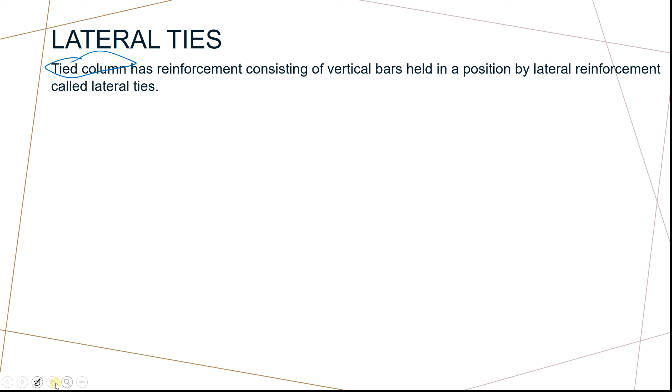So after the main bars, lateral ties na punta. So tied column, di ba natin ito kaklase sa column, we have the tied column, we have also the spiral. So sa tied column, iyang ties ginatawag na to lateral ties. So katong vertical reinforcement is being held in position by lateral reinforcement. Ginatawag na to na sila og lateral ties.

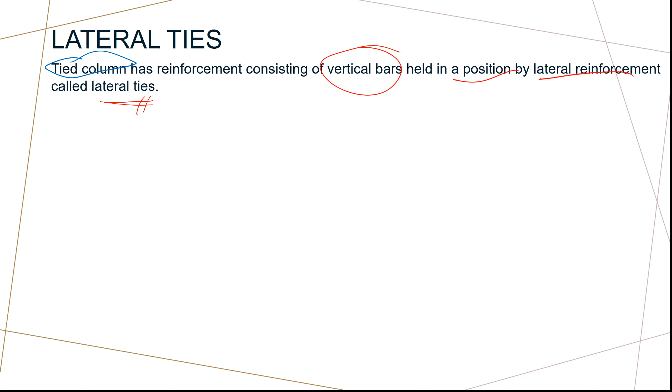Okay. So as per the ACI code, all non-prestressed bars for tied column shall be enclosed by lateral ties of at least number 3. So kaning number 3, this is the imperial, and then ako lang ning gibutang ang SI. Size number 3 is 10 mm for SI. So for bars nga 32 millimeters diameter or lesser, lateral ties should be at least 10 millimeters.

And for bars nga 36 millimeters up to 57 millimeter diameter, and katong nakabundled, ang imong gamiton nga lateral ties is 12 millimeters. Unsa man ning bundled, sir? So, di ba, atong naandan nga ang columns, iyang bars kay nakatagsa. Ang bundled is itulo diri gibundle, that is ginatawag na bundled. Aron makakuha sa space and same ra gihapon makuha ang reinforcement. So, if bundled, at least 12 millimeter ang ties.

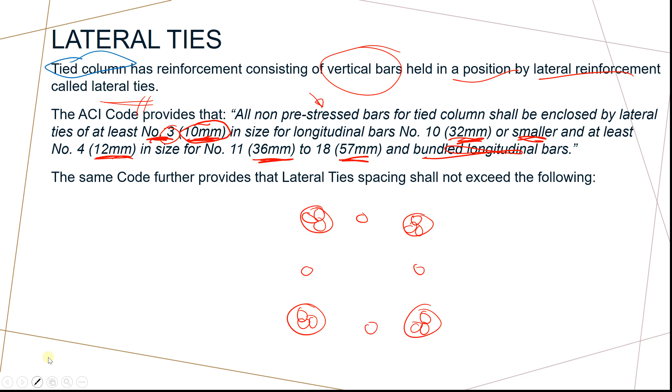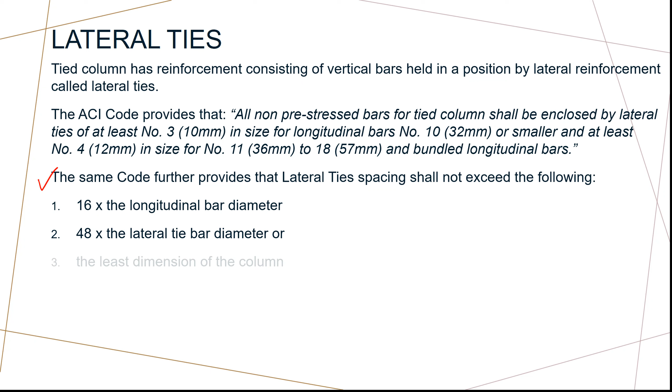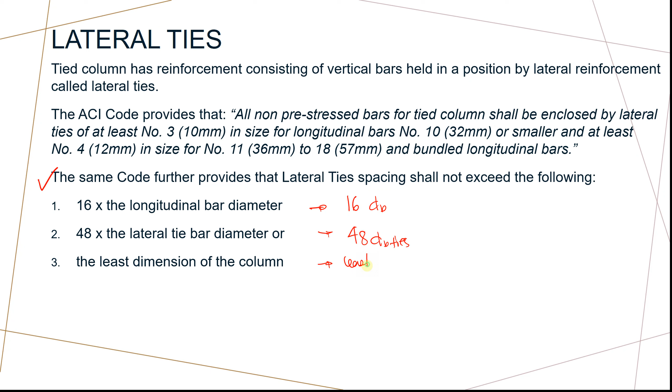The same code further provides the lateral ties spacing. So, as per the ACI gyapon, the maximum spacing should be either 16 times the bar diameter of the main bar, or 48 times the bar diameter of the ties, or the least dimension of the column. So, aron masabtan, diretso ta sa example. By the way, this is the bar designation number and then the inches and mm. So, bar number 3, that is 10 mm. Bar number 4, that is 12 mm diameter. Bar number 5 is 16 mm diameter, so on and so forth.

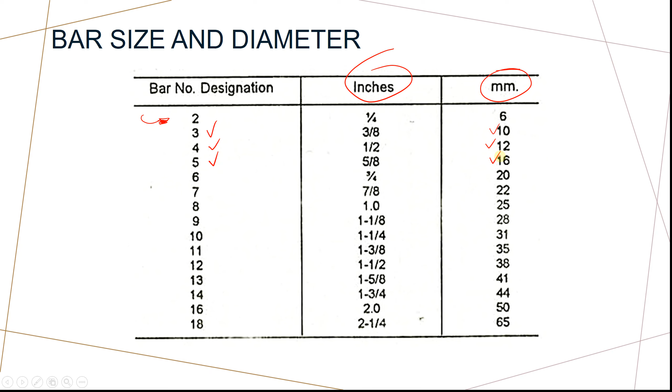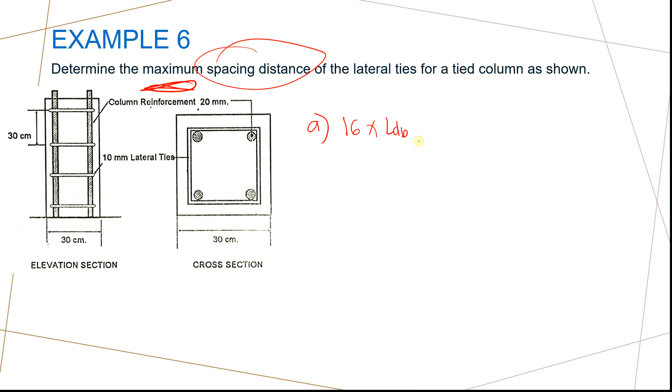Okay. So, we determine the maximum spacing distance of the lateral ties for a tied column. So, ang gipangayo diri is just the maximum spacing distance. Sa pagkuha sa maximum spacing, we have 3 considerations: 16 times the diameter of the longitudinal bars, 48 times the diameter of the tie bars, and the least horizontal dimension. So pila man ang diameter sa main bar? Tan-aw ka sa plan, nakabutang diri nga 20 mm. So 16 times 20 millimeters, that is equal to 320 millimeters.

And then 48 times pila man ang diameter sa ties? Nakabutang diri 10 millimeter lateral ties. So times 10 millimeters, which is equal to 480 millimeters. Now, ang ikatulo is the least, kinagamyan nga dimension sa column. So pila man ang dimension sa column? Ang gibutang diri is 30 centimeters. So 300 millimeters ang least dimension.

Now, how about if duha na siya? What if 40 and 50? So, kinagamyan sa duha is 40, 40 cm imong gamiton, if that's the case. Pero diri 30 cm ang given, and if wala other given na side, assume nga square siya. So, among the three, ang maximum spacing distance is ang kinagamyan. Pasabot dili ka molapas. So the maximum spacing distance for this example is 300 millimeters, or 30 centimeters, or 0.3 meters.

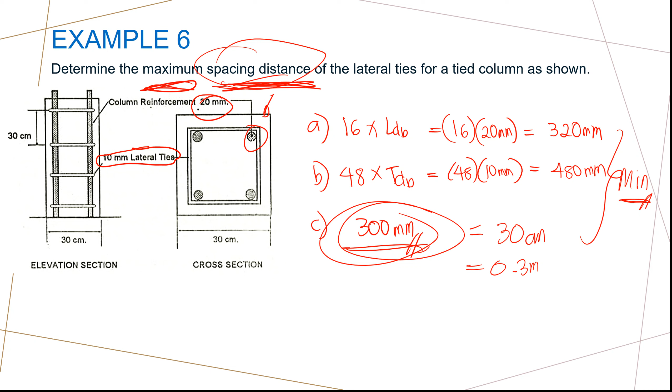Take note that this is just the maximum spacing distance. Now, when you quantify, lahi ang spacing distance sa ties depende near the support ug at the midspan of the column. So, tan-awa tanan sa plan. But for this one, for discussion purposes, atong gi-consider ang maximum spacing distance which is 0.3 meters or 300 millimeters.